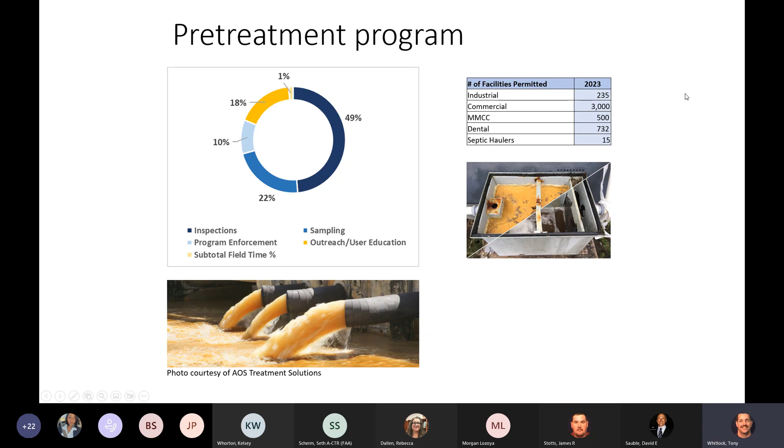Of the major facilities that are contracted out to Inframark, our largest is the North Canadian wastewater plant, which is capable of treating 80 million gallons. Deer Creek is capable of treating 15 million gallons. Chisholm Creek is capable of treating 10 million gallons, and South Canadian is 6 million gallons. And we have a large pumping station that feeds the North Canadian wastewater plant, and it has a capability of holding water in the lagoons of 52 million gallons.

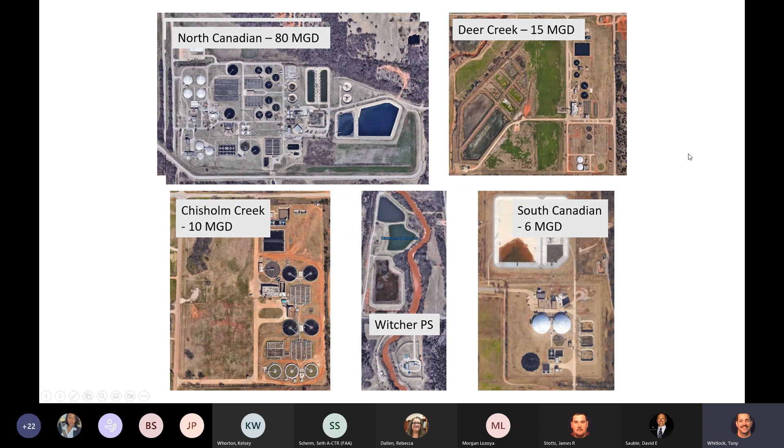This is a flow diagram of the wastewater treatment process, where it comes from the homes. We have bar screens to remove the debris, a grit removal system to remove the sand and grit, which is our inorganics, and the primary clarification, number 3, which removes any settleable solids and scum that floats, and which allows the gray water to flow to the aeration basin, where we add oxygen to mix with the microorganisms and bacteria. And the settled solids will be returned back to the treatment process.

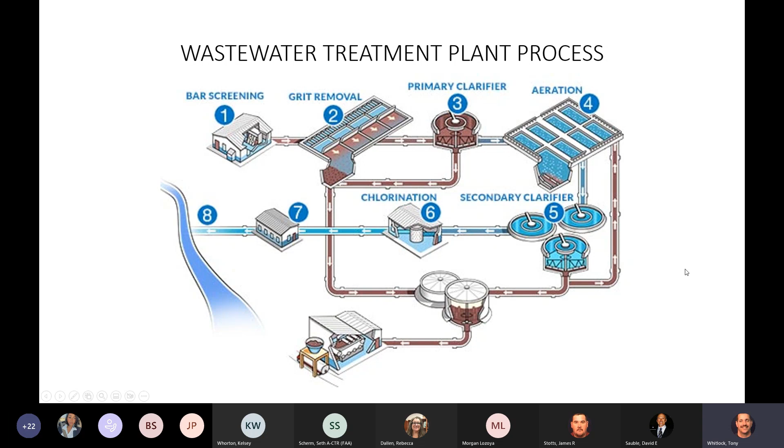Then the clear water will go to the secondary clarifiers and follow on to the next treatment process of chlorination, where we remove any pathogens before it runs into the streams, and all the biosolids are dewatered and then applied to farmland.

So we'll start off with the largest plant, North Canadian. It's an 80 MGD plant. It was built in 1980. It currently has an average flow of 45 million gallons a day. North Canadian's liquid treatment process consists of preliminary treatment, primary treatment, secondary treatment, and tertiary treatment. This facility also includes various odor control devices such as chemical scrubbers, ferrous chloride and hydrogen peroxide.

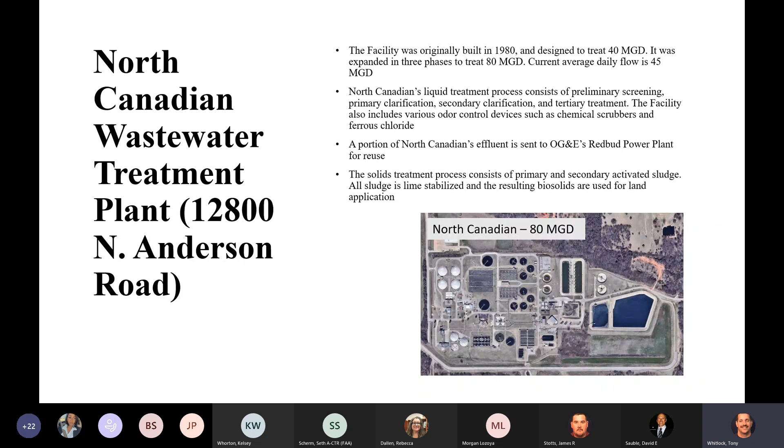A portion of the North Canadian water we call reuse water will go to OG&E Redbud. We send them approximately 5 million gallons a day for their cooling towers. And the solids treatment process consists of primary and secondary activated sludge. All sludge is lime stabilized, resulting in biosolids that are used for land application.

Next slide. Deer Creek was originally built in 1982. The facility is capable of treating 15 million gallons a day. It currently treats around 11 million gallons a day. It has various odor control devices such as chemical scrubbers, ferrous chloride, and hydrogen peroxide.

A portion of the Deer Creek reuse water, treated water, goes to Gaillardia, to the golf courses. We send them approximately 500,000 to 1 million gallons a day. It's to fill up their ponds at the golf course.

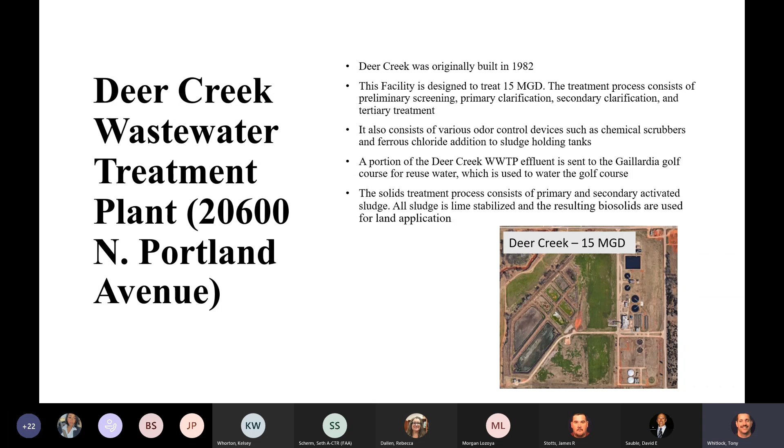Our next treatment plant according to size is the Chisholm Creek Wastewater Plant, which was built in 1976, and it is designed to treat 10 million gallons a day. It currently treats around 5 to 6 million gallons a day.

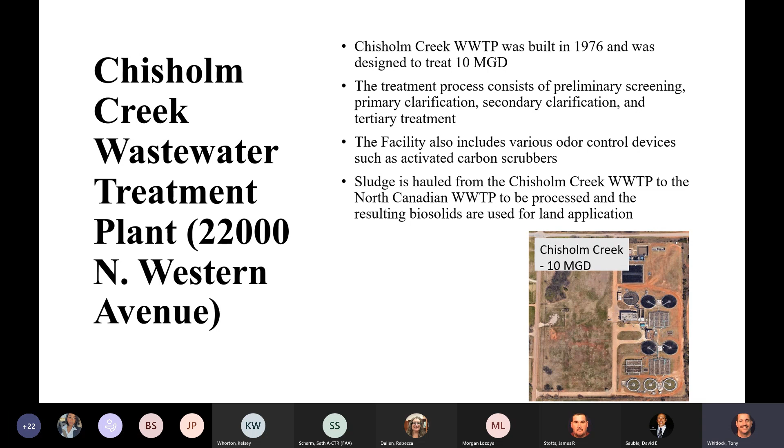The treatment process consists of preliminary screening, primary clarification, secondary clarification, and tertiary treatment. This facility also consists of various odor control devices such as activated carbon. And the sludge at this facility is hauled from Chisholm Creek to the North Canadian Wastewater Treatment Plant for further processing.

Our smallest plant, which is being built into a whole new plant currently, is the South Canadian Wastewater Treatment Plant. It was built in 1986 and has a design flow of 6 million gallons. And currently we treat around 6 million gallons. The wastewater treatment consists of preliminary screening, secondary treatment, which is a sequencing batch reactor, followed by tertiary treatment.

Approximately 1 million gallons a day goes to the OG&E power plant, McClain Power Plant, for their reuse water. Sludge is aerobically digested, followed by dewatering, and the solids are commingled with the rest of the solids in the Oklahoma City project.

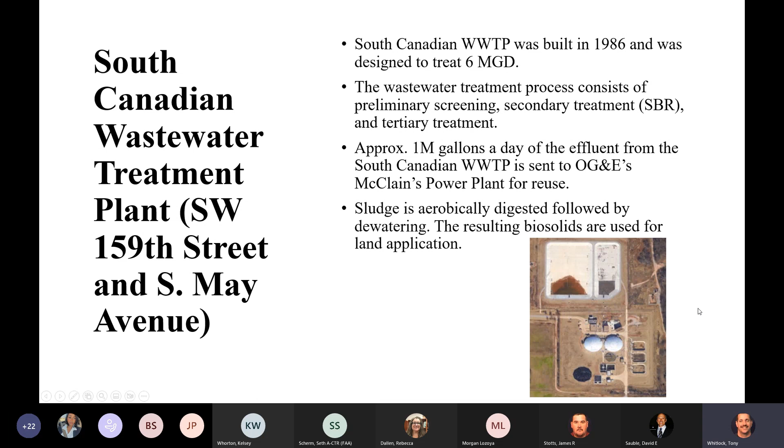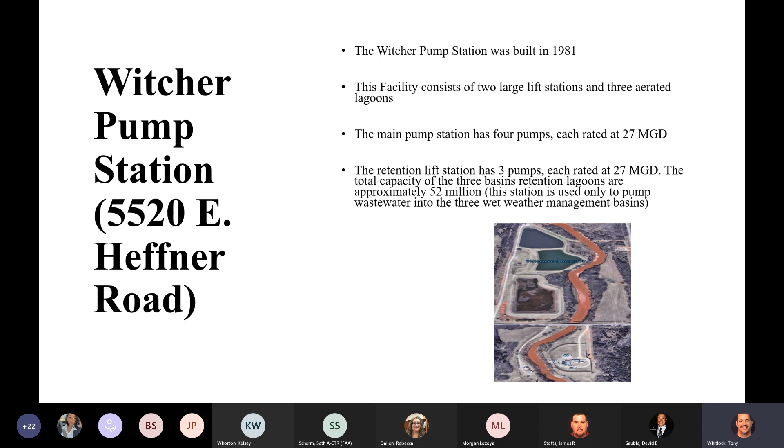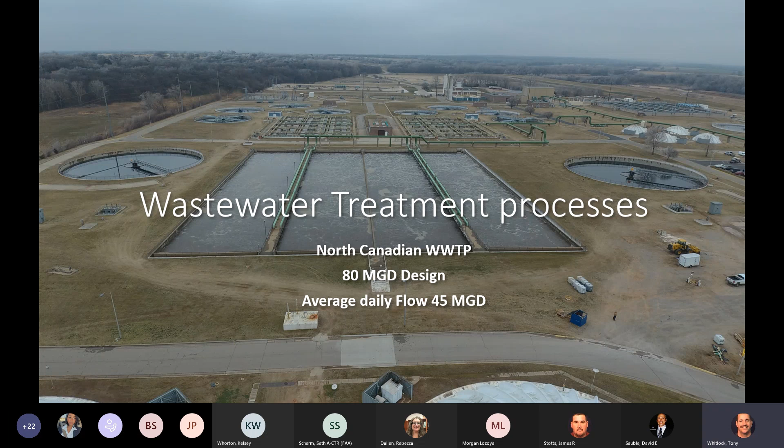This is our largest wastewater plant, the North Canadian Wastewater Treatment Plant. Like I said earlier, it's designed for 80 million gallons, and its average daily flow is 45 million gallons.

Inside the wastewater treatment plant, we first start off with preliminary treatment. That's where we remove any rags, any kind of debris, floater debris. It goes to a set of bar screens. The bar screens remove the rags, plastics, toys, whatever is flowing down the collection system. All that trash goes through the bar screens, then ends up in a dumpster, which we take to a landfill.

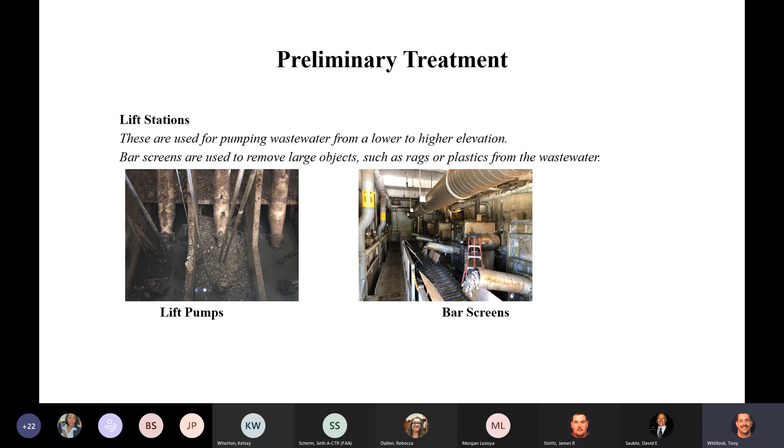The next process, still in the preliminary treatment, is the grit removal system. The flow here slows down to a velocity of about 1 foot per second and allows all the inorganics to settle to the bottom, and those inorganics are scraped to the hopper and conveyed to the dumpster, and that grit is removed and sent to a landfill.

Now all the organics will continue to flow through the system into our next process. The idea of the preliminary treatment is to get rid of all the inorganics and trash, and only allow the organics to go to the secondary processes for biological treatment.

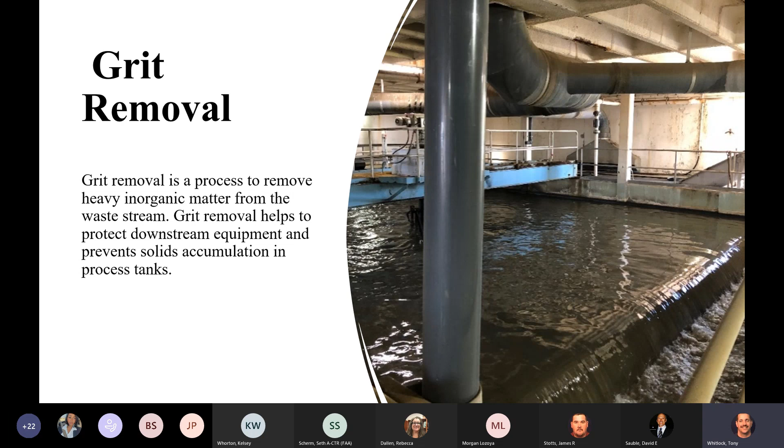The next stage is the primary clarifier. All the gray water flows to the primary clarifier, and it will have some suspended solids, and those suspended solids over a 2-hour detention time will settle out. The flow slows down to about 0.8 feet per second, 0.05 feet per second, and that flow slows down enough to allow the settleable solids to settle to the bottom and be pumped to the sludge holding process to be treated later.

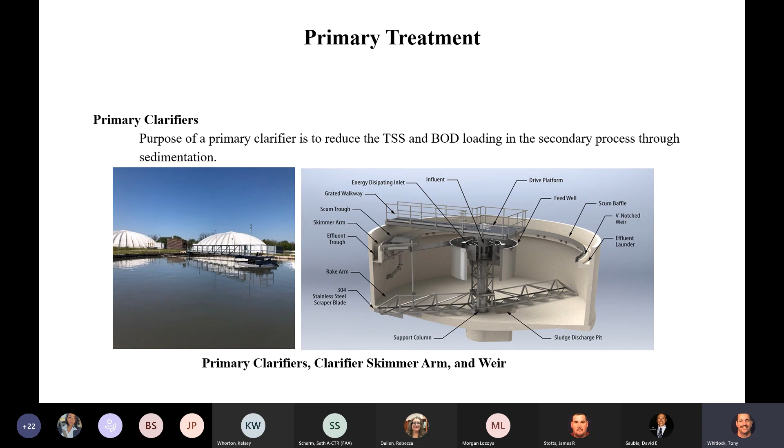The gray water that flows from the primary sedimentation flows... Well, here we go. This is the primary pump building. This pumps the sludge from the primary clarifiers to the sludge holding tanks for treatment later on.

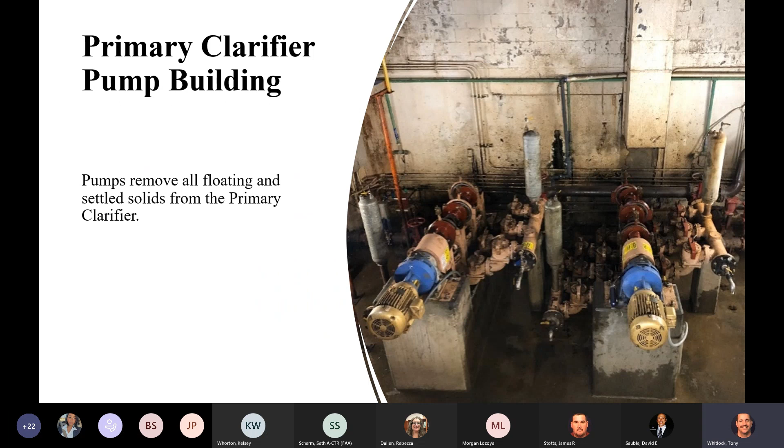All right, now we're into the heart of the system. It's called the secondary treatment. This is where all the treatment takes place. This facility consists of 4 major aeration basins. 25% of the aeration basin consists of microorganisms. Those microorganisms are found naturally in the environment, but we concentrate them into confined spaces so we can have an accumulation of microorganisms to treat all the pollutants that come through here.

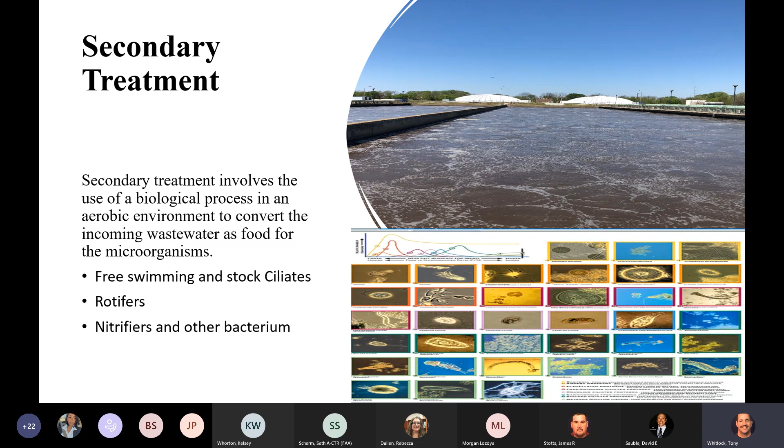The amount of time for a molecule to go from one end to the other end is about 8 hours, but the microorganisms will stay in the system for about 10 days. And these aeration basins will consist of bacteria, stalked ciliates, rotifers, nematodes, and free-swimming ciliates.

After the water flows from the aeration basin, it flows to the secondary clarifier. This is where the biological sludge will settle out and be returned back to the aeration basin, because we just recycle it and keep a certain volume in the aeration basin, but the vast majority of it is recycled in a circle. You can see the clear water flowing over the weirs, and the clear water will flow to tertiary treatment.

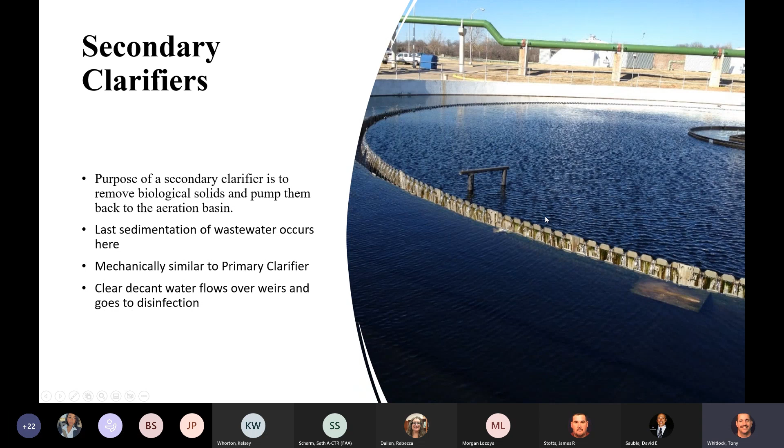The aeration basin, we have a large amount of blowers. 50% of our electrical cost are these blowers. They supply oxygen to the aeration basin for the microorganisms.

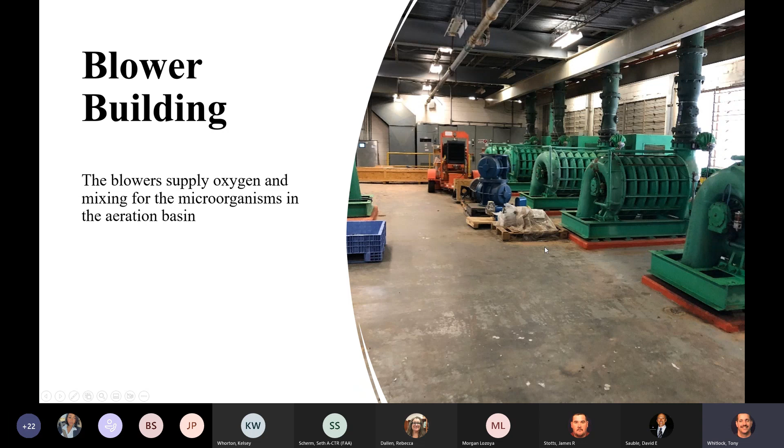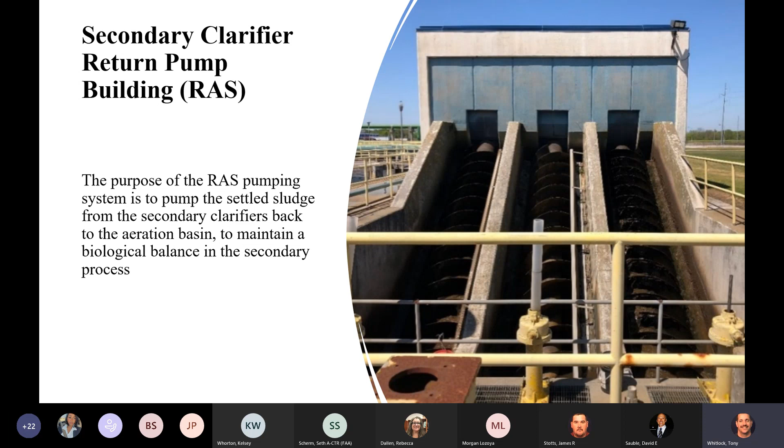These are the screw pumps like I said earlier. A large portion of the settled sludge from the secondary clarifiers will be returned back to the aeration basin. When the microorganisms are in the secondary clarifier, they'll be in there for a couple hours settling out. And so when they return back to the head of the aeration basin, they've been without oxygen for a while, for a couple hours, and they'll be without food for a couple hours. So when they hit the head of the aeration basin, they're the most active and responsible for a big portion of food consumption of the organics and pollutants.

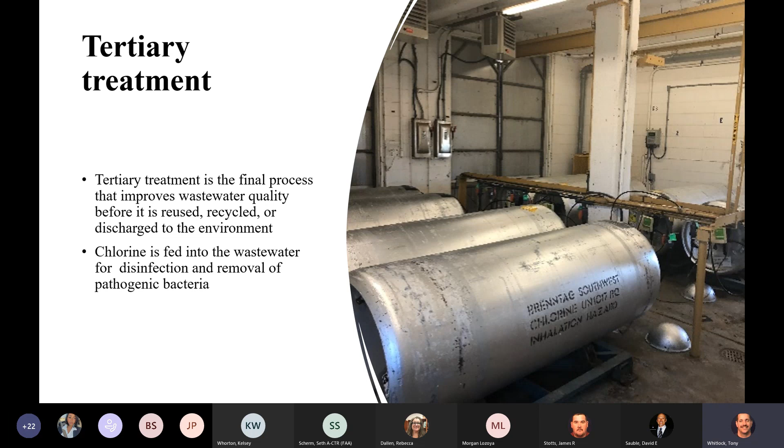In tertiary treatment, at the moment we feed chlorine as a disinfectant to remove any pathogens. In our regulated permit, we're responsible for removing E. coli down to a level of 400 CFU, colony forming units. It depends on the time of year what our limits are. When we chlorinate, we have to have a minimum detention time of 30 minutes, and 15 minutes at peak flow. So it gives the chlorine enough time to react to killing off any pathogens.

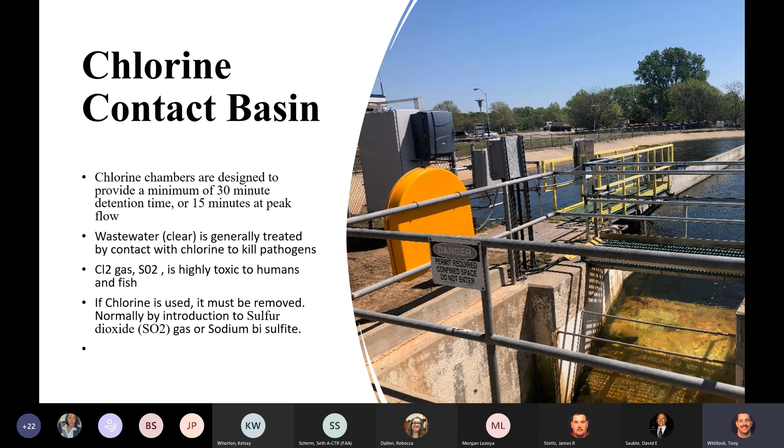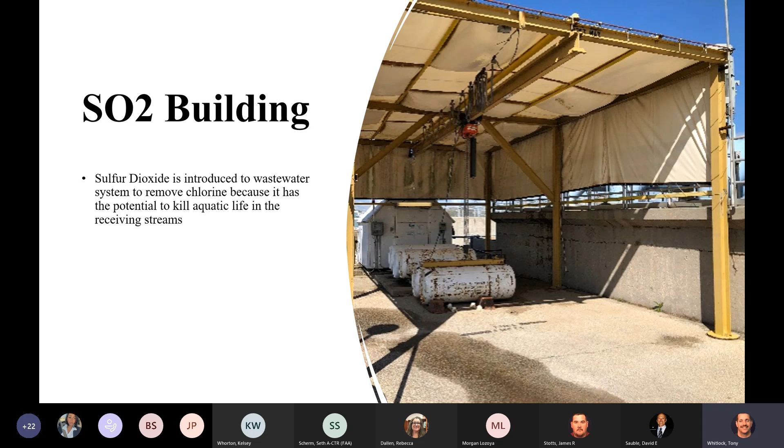Chlorine gas and sulfur dioxide are toxic to humans and the fish. So when the water leaves here, it's chlorinated. The next stage is we have to remove the chlorine, and we remove the chlorine by sulfur dioxide. The sulfur dioxide will remove the chlorine at like a 1-to-1 ratio, and so the water that was dechlorinated is safe for the receiving stream. So all the species in the receiving streams won't be affected.

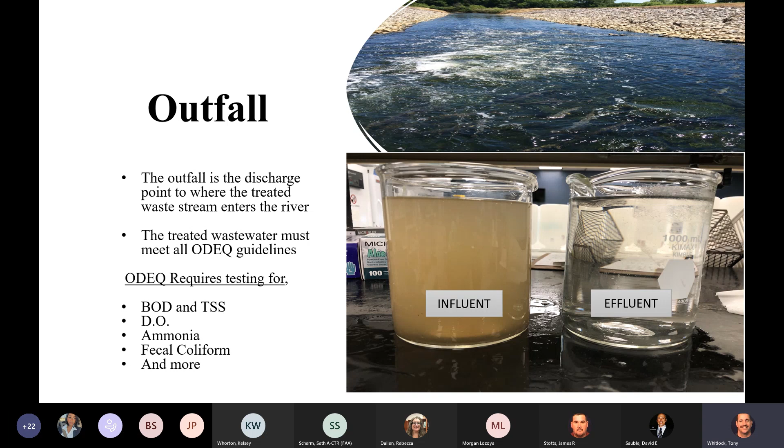And the picture up above is our outfall that goes to the North Canadian River. You can see that picture has an abundance of gar. They come upstream in April and spawn in our effluent. And you can see on the slide just a few of our permit requirements: BOD, TSS, dissolved oxygen, ammonia, fecal coliform, and much more. We didn't list all our permit requirements there.

Like I said earlier, our portion of the reuse water of North Canadian will go to the Redbud Power Plant. They use it for cooling water, and we have a contract to send them a maximum amount of 10 million gallons a day, but we average around 5 million gallons. After they use the reuse water about 4 or 5 times, they send it back to us. When they send that reuse water back, it is high in total dissolved solids because it's been concentrated 4 or 5 times recirculating in their cooling towers at the power plant.

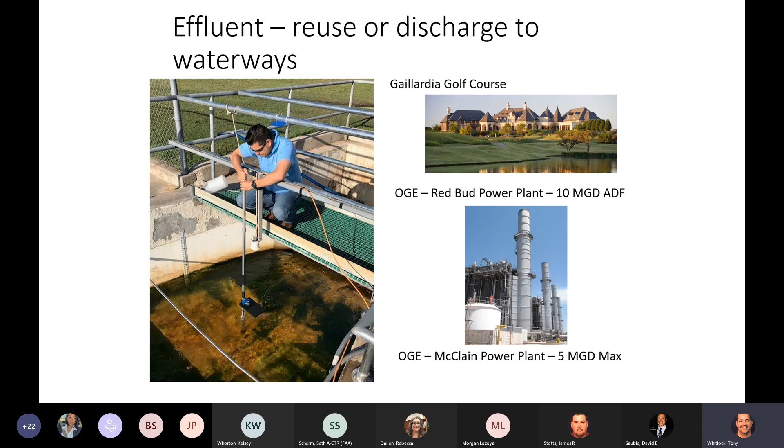This is a picture of the Redbud Power Plant up there in Luther. The reuse water that we send them has to meet Category 3 in the ODEQ regulations.

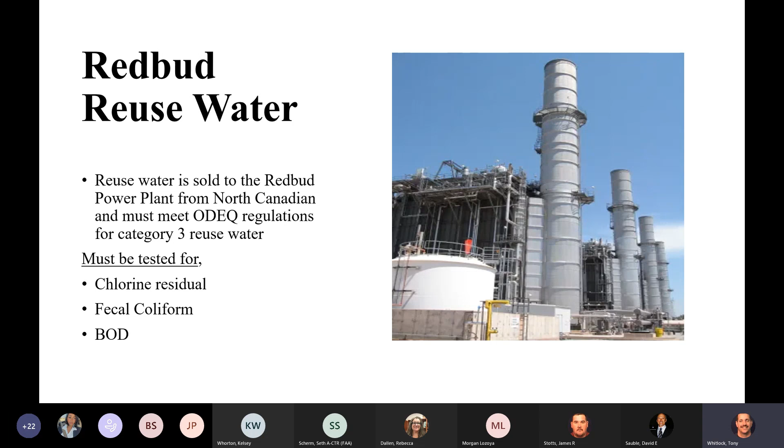All right, we're going to present a small video here, and then we'll finish up the presentation with what we do at the biosolids.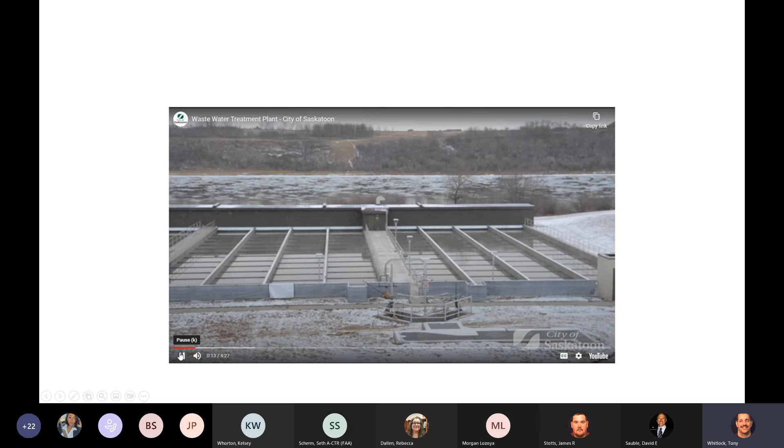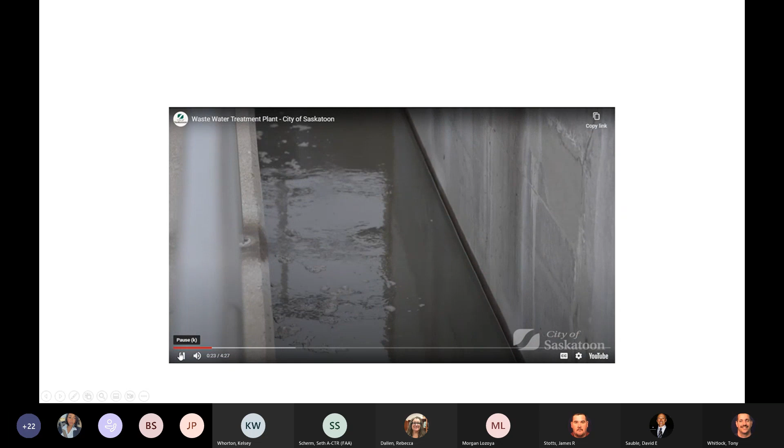Hey, can you restart your microphone? We were getting double audio on that, and I muted you and I can't unmute you. Sorry, it was echoey, and I was hoping that if I muted you guys, it would stop the double effect. Make sure you take your microphone off of mute. Yeah, we can't hear it right now because I need you to turn your microphone back on. I'm so sorry. On. Okay, yeah. I don't know why it was echoing, but I guess we'll just listen anyway. Okay. As I was sitting here jabbering and talking. Water and waste. Okay, we'll go here.

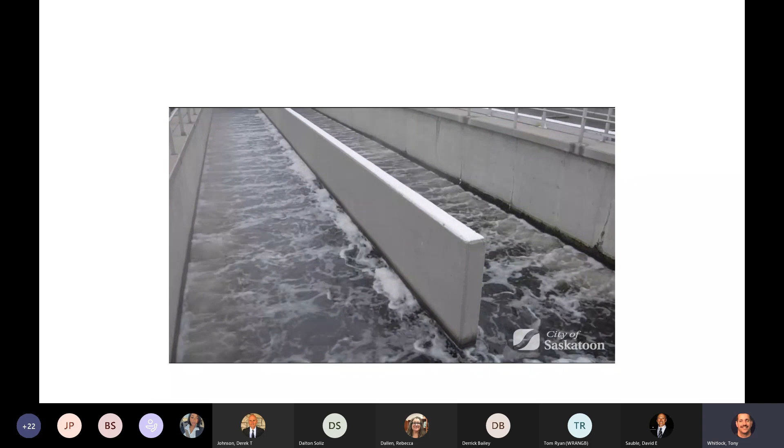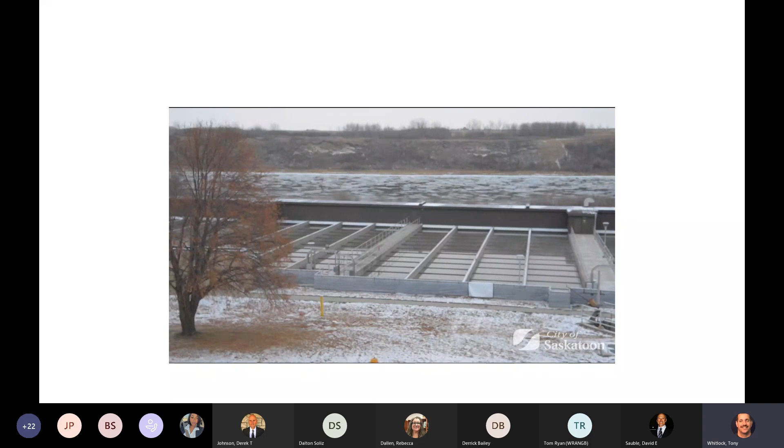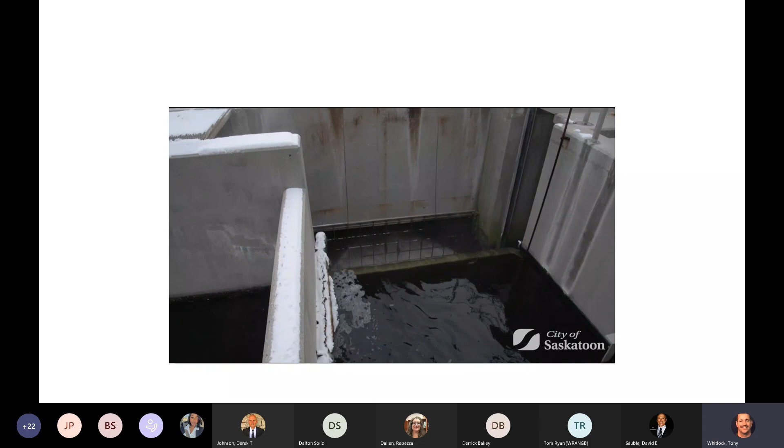Did you know over 90 million liters of wastewater is treated every day at Saskatoon's wastewater treatment plant? That's enough to fill 36 Olympic-sized swimming pools. So what exactly is wastewater? Wastewater is any combination of water and waste that is flushed down your toilet, sink, or tub. This wastewater eventually ends up in the South Saskatchewan River. But before it gets there, it's treated at the wastewater treatment plant.

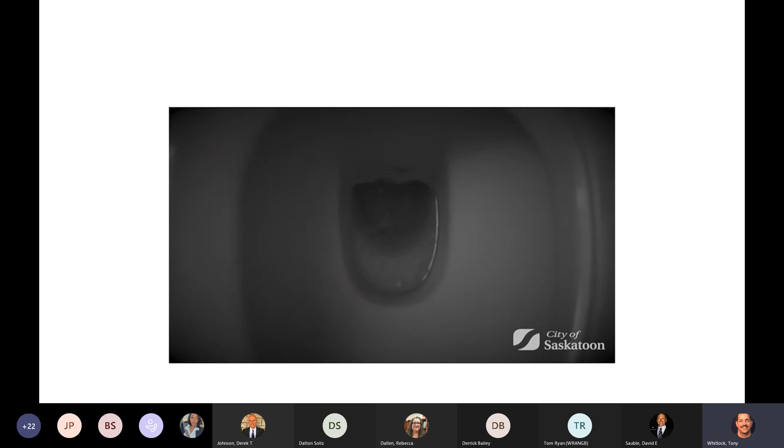We use some of the most environmentally sustainable and up-to-date treatment processes at the plant to protect the people, property, and the environment downstream. So how does wastewater get to the wastewater treatment plant? Wastewater flows from the sinks and toilets in homes and businesses and from industries in the community into an underground maze of pipes called the sanitary sewer system.

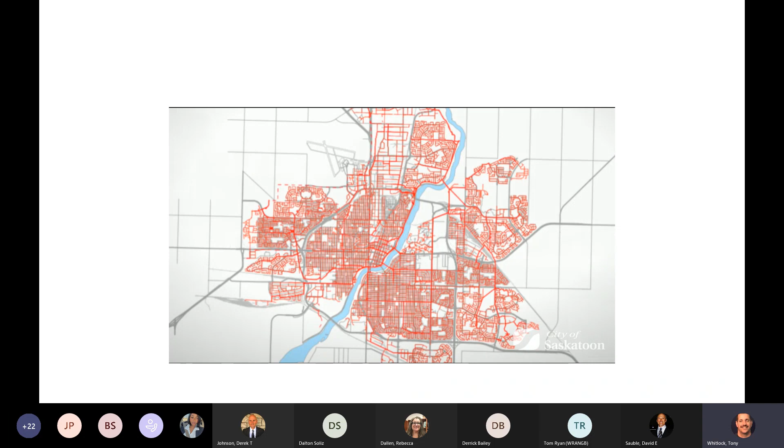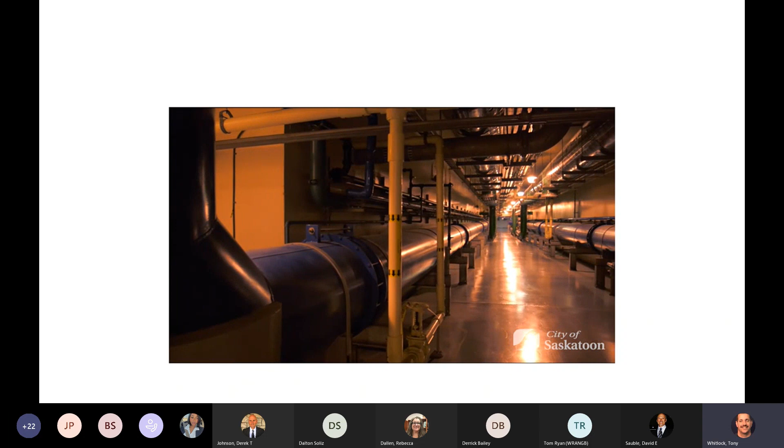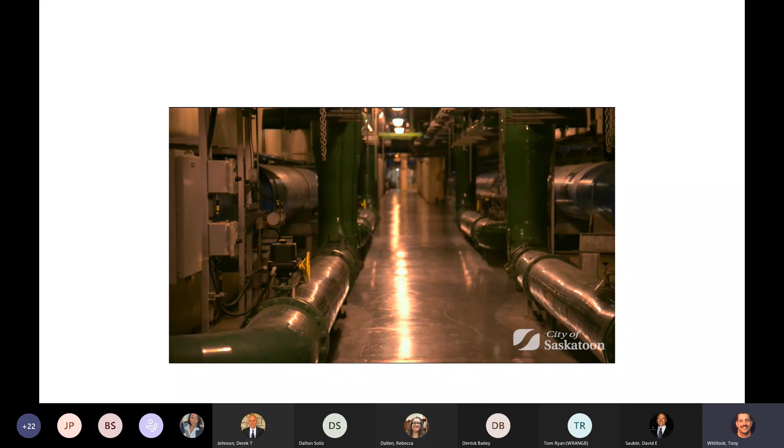Saskatoon's wastewater collection system is about 1,050 kilometers long, approximately the distance to Edmonton and back. A gravity system and 28 pump stations located throughout the city keep the wastewater moving. Once the wastewater reaches the plant, an extensive and complex treatment process begins. Over 200 pumps and mixers and over 50 kilometers of internal piping, enough to stretch around Saskatoon's Circle Drive twice, help the wastewater travel through the plant.

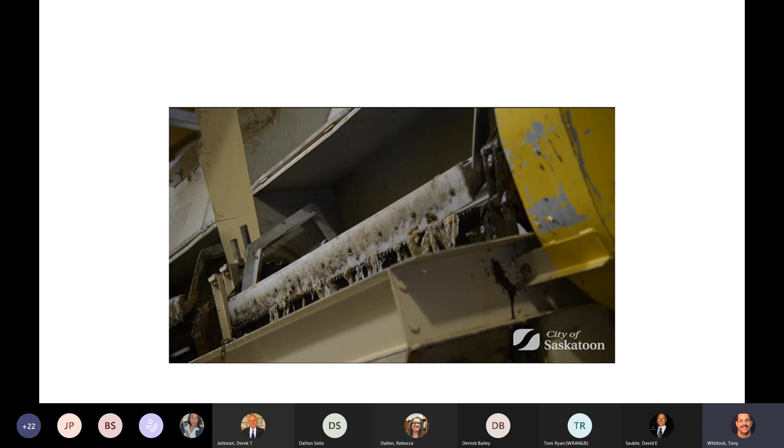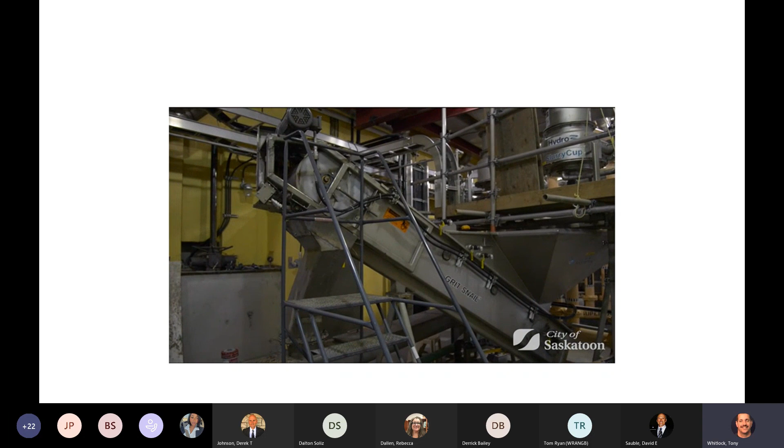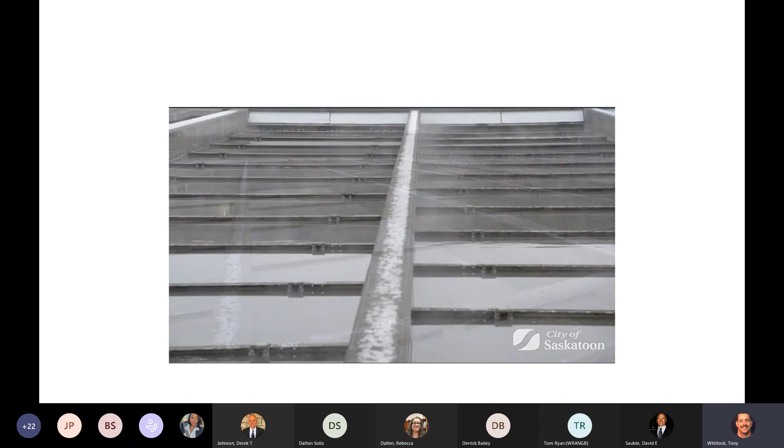In the first stage in this treatment process, the wastewater passes through a series of screens to remove materials larger than 12.5 millimeters. These materials are cleaned and transported to the landfill. The wastewater then travels to large basins where heavier materials, called sludge, settle and sink to the bottom. Lighter materials, including fats and oils, called scum, float to the top. The sludge and scum are sent to fermenters and digesters, where bacteria breaks it down further.

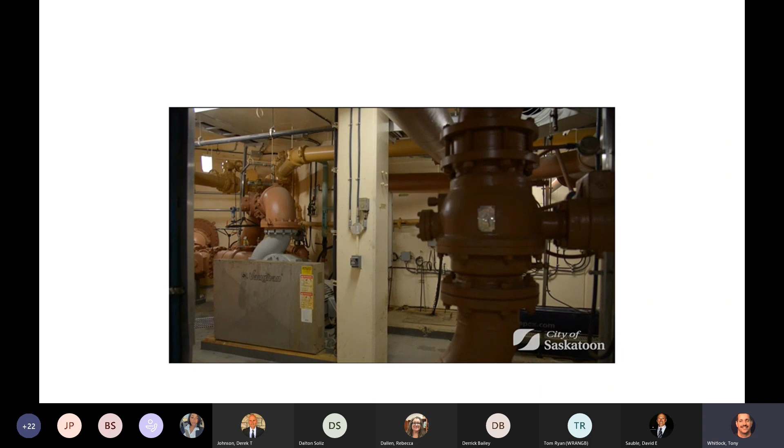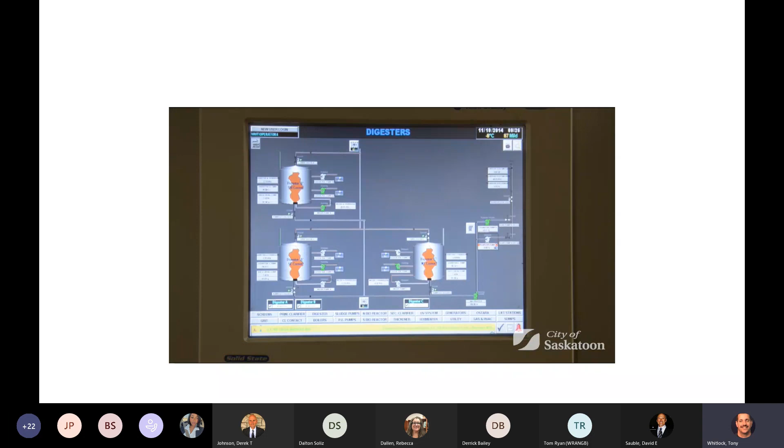During this process, methane gas is produced, enough to heat about 390 homes each year. We use this methane as fuel to heat the buildings and certain processes at the wastewater treatment plant. Any excess methane is flared. The sludge, about 5,600 tons per year, is pumped into storage cells and used as fertilizer on nearby farmland.

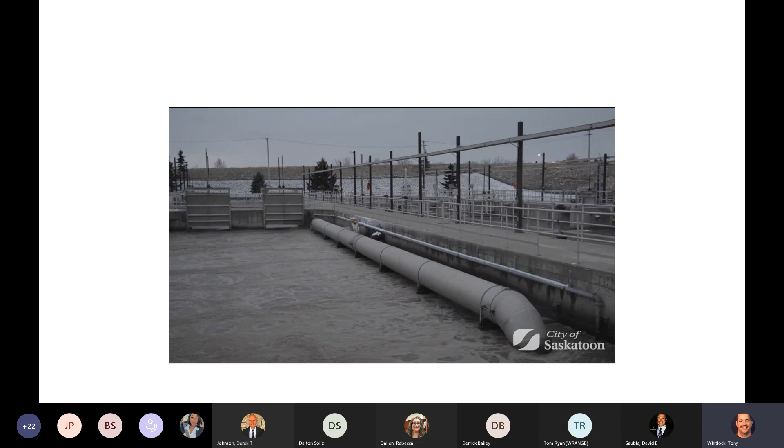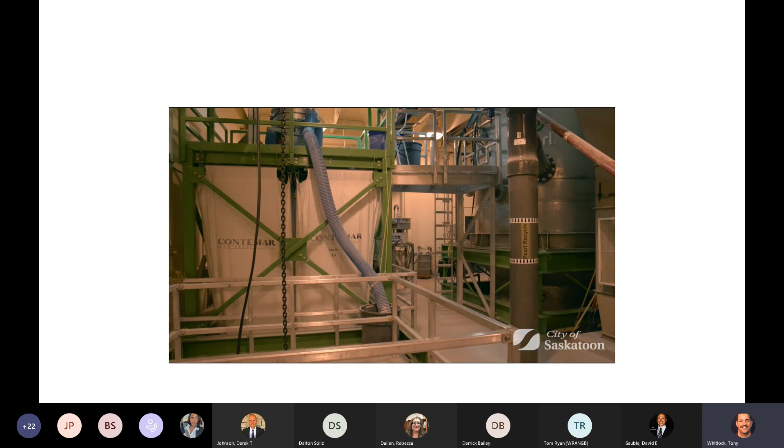The remaining water from the primary sedimentation basins is pumped to another process where nutrients like phosphorus and nitrogen are removed using naturally occurring microorganisms. In 2013, Saskatoon became the first city in Canada to recover this phosphorus and nitrogen and use it to create a product called Crystal Green, an environmentally responsible and extremely efficient fertilizer.

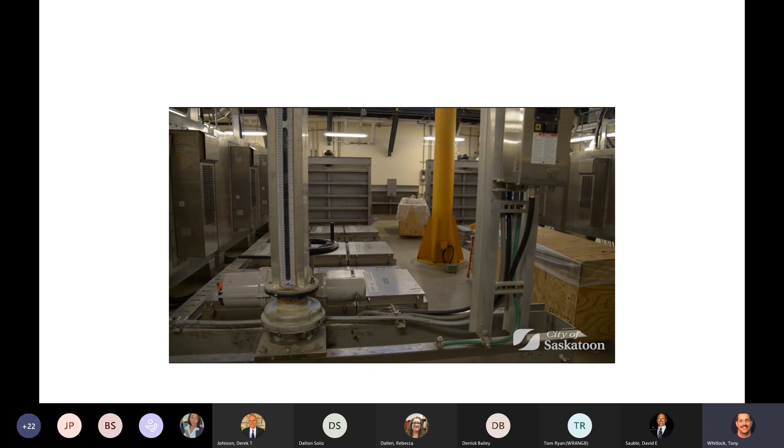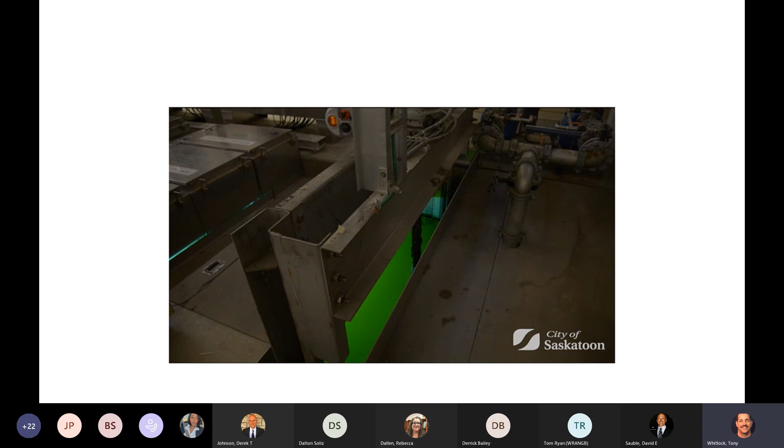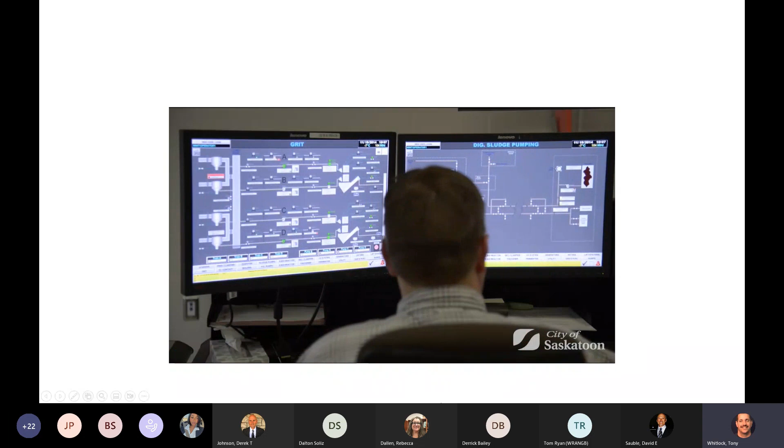Finally, the wastewater passes between ultraviolet lamps, sterilizing any remaining parasites and bacteria, such as Cryptosporidium, E. coli, and Giardia, before the water is deposited back into the South Saskatchewan River. Our treatment process ensures the final wastewater does not harm our precious river and downstream users. Back at the plant, all aspects of the treatment process are closely monitored 24 hours a day, 7 days a week by highly trained plant operators.

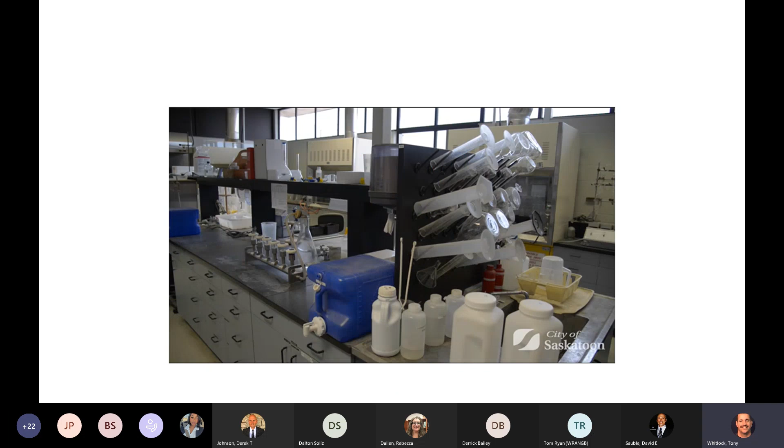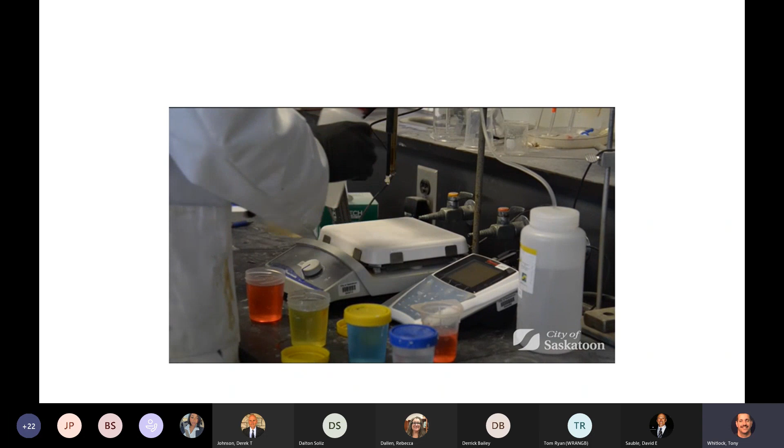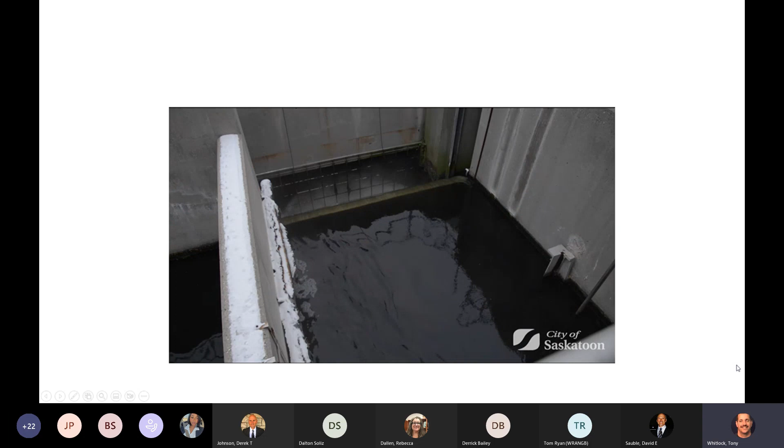Our on-site laboratory performs about 30,000 analyses each year to ensure continuous quality control, record the plant's performance, and monitor the environment. We're also prepared to expand our operations as our city continues to grow. We have a 30-year long-term capital development plan and the capacity to ensure effective and efficient treatment for a population of about 500,000 people. Protecting people, property, and the environment. These are the priorities of the wastewater treatment plant.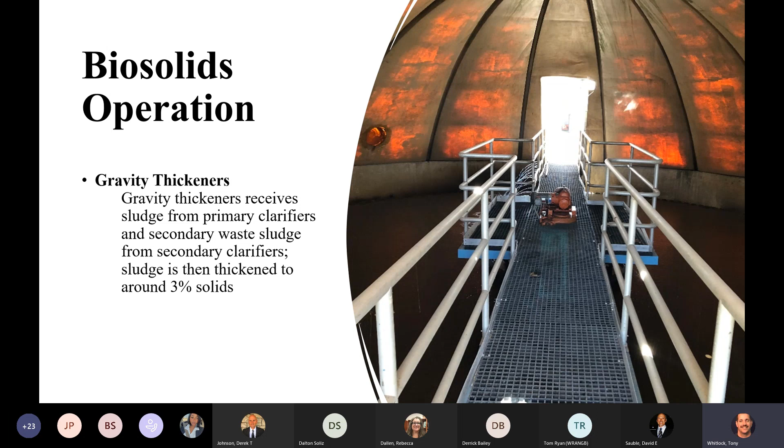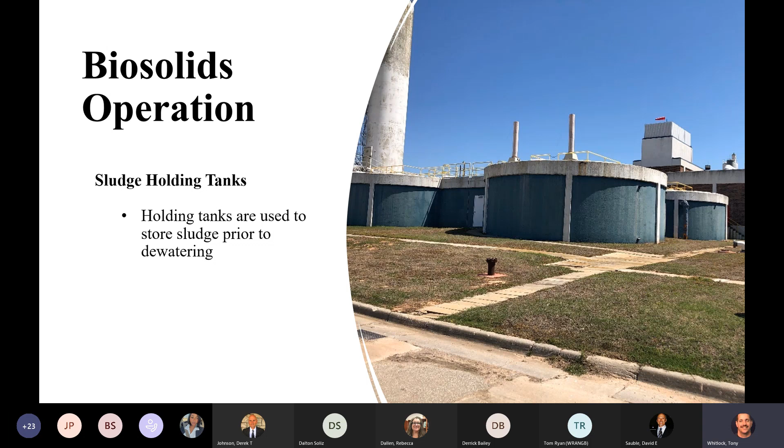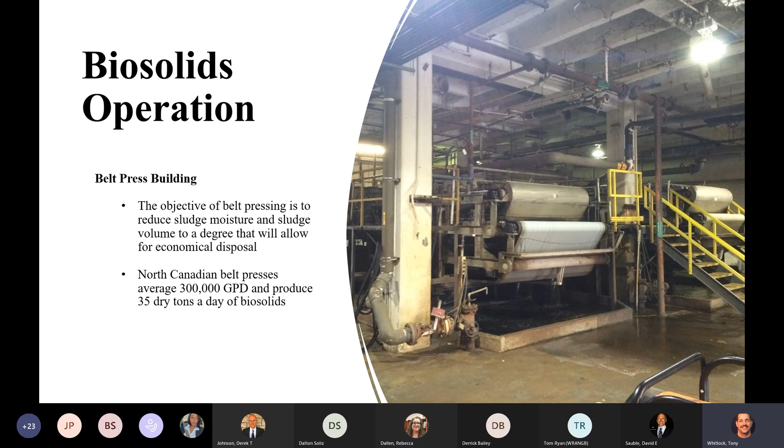When we're ready to pull from the sludge holding tank, we have 4 large dewatering units called belt presses, the 2-meter belt presses. They dewater the sludge from 3% solids to around 24 to 28% solids. At the North Canadian wastewater plant we belt press on average around 300,000 gallons per day, which is around 35 dry tons of biosolids. As you see in this picture here, we add lime to remove any pathogens in the biosolids.

Through the 503 regulations of the EPA, we have to add the lime to kill the pathogens, and we have to lime it up to a pH of 12, keep it at a pH of 12 for 2 hours. Then for the next 22 hours, it cannot fall below 11.5 pH.

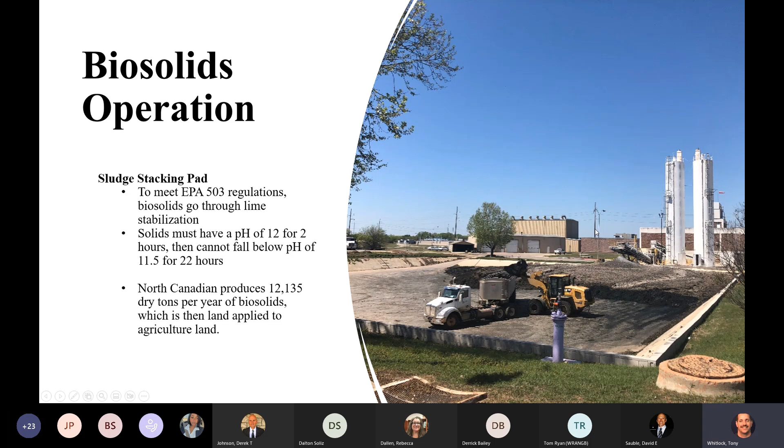North Canadian produces around 12,000 dry tons per year, which is applied to agricultural land. Our biosolids program, we have around 11,000 acres permitted throughout the community. We annually only need around 4,000 acres.

And you see right here, the solids from the sludge stacking pad is trucked to farmland. It is dumped on the ground. Then after it's dumped on the ground, it is put into a manure spreader. The manure spreader will spread it onto the ground at about a rate of 30 wet tons per acre.

That is part of our vector attraction requirements. That way any flies or rodents or anything won't run across the farmland and into somebody's house and potentially spread any kind of disease, which it's already been lime stabilized to kill any pathogens at that point also.

Yeah. I'm gonna take over sharing. I think it'll let me. I pulled up our GIS map, and I was just gonna turn on the wastewater layers. So just for grins and giggles, so you guys can see just how much of the city is covered by the wastewater infrastructure. All the sanitary sewer lines are represented by the things that just turned on.

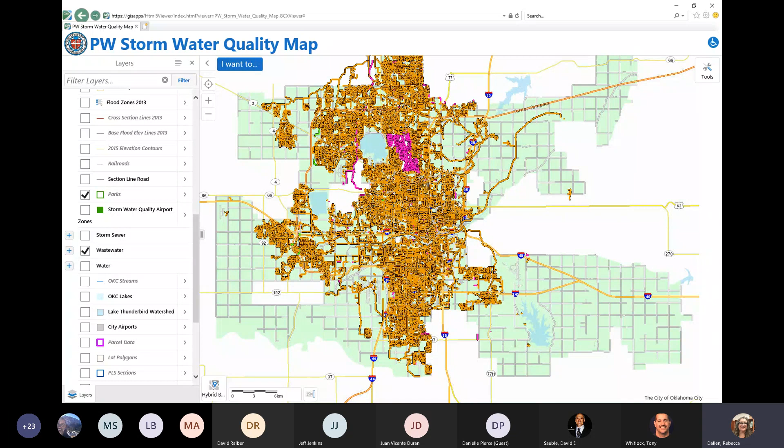But you can see that there's a lot of places in the outskirts that probably use septic tanks, and they aren't directly connected to the wastewater plants. But that's certainly a lot of miles and miles of infrastructure to keep track of. So the line maintenance folks at the city have their work cut out for them. That's for sure. So I just thought that was interesting.